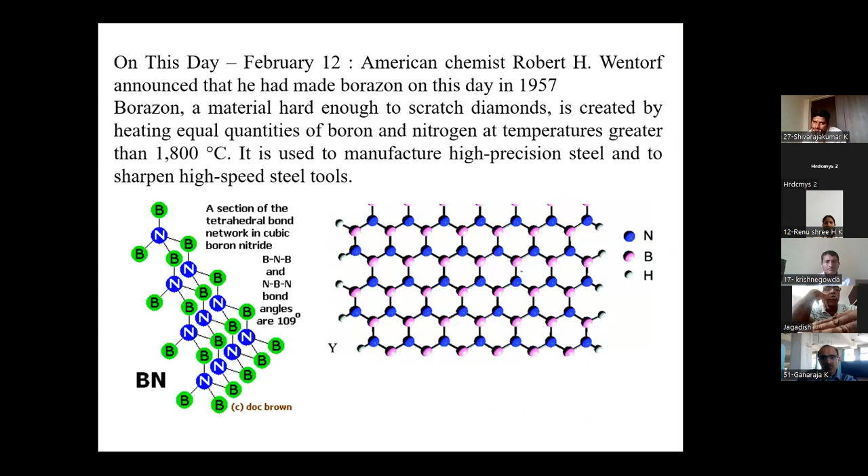So in the meantime, since I am a person working on plastics, we need to develop materials which are sustainable to Mother Earth. So new technologies and approaches are being developed, and you can see biodegradable plastics coming to the market. Still, I won't agree, being a polymer scientist and chemist—it is difficult always to make a material that can mix with the environment and in the soil. It is very difficult, so better not to use much of these plastic materials.

Next slide, please, sir.

So you can see here how traffic has increased and how difficult it is. Recently during Dasara, people were unable to move even a kilometer. Initially when we were children, we didn't have vehicles, and there were only one or two vehicles on the road. Now for one kilometer you can see more than a hundred, like in Delhi, Bangalore, Mumbai, all choked by traffic and the number of vehicles. You can see in the later slides the number of vehicles—I heard in last week's newspaper that 25 lakh vehicles have been registered in Bangalore alone. So imagine the rest of the country. Okay sir, next.

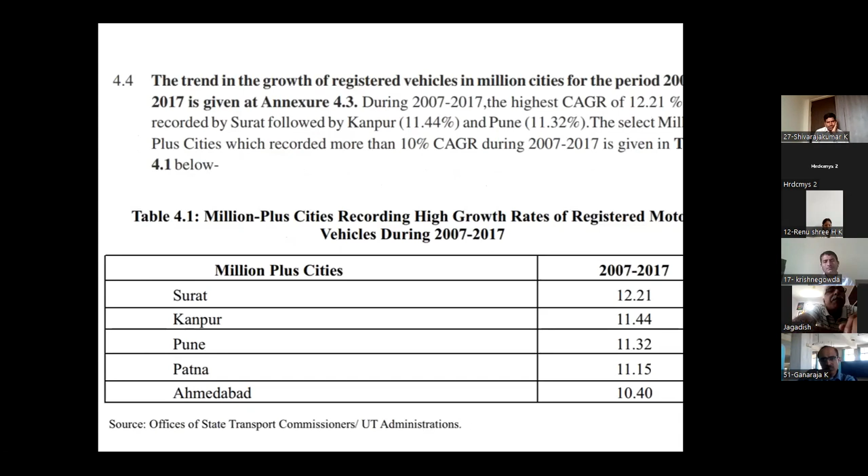Next. So as I earlier told, the two-wheeler population is increasing like anything. Even you can see women started driving from some 30 years back. So now the women population is also going for single vehicles, so the vehicle count is also now getting doubled due to this.

Next page. Here are the total number of registered motor vehicles in millions. How many millions have been registered till 2017, but in 2019 it is still more. Next slide.

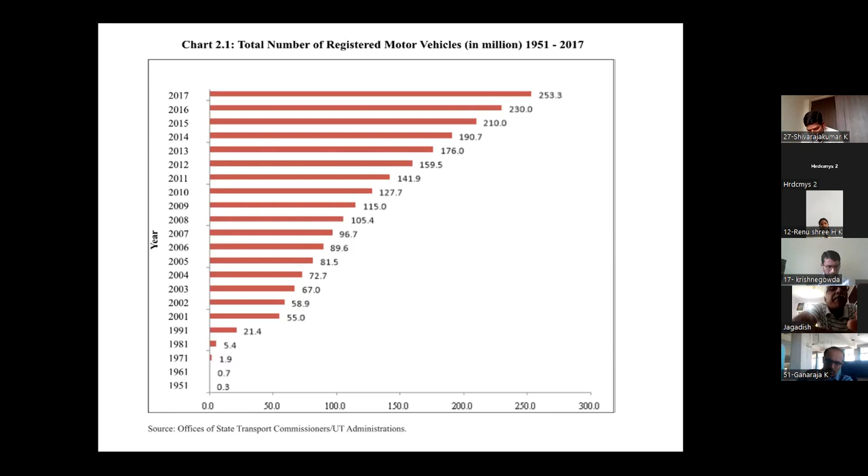See, now I am just talking about the tires. The basics of any mobility is the tire. As you know, in India we usually abuse everything, including plastics. You can see even a chocolate cover or a small peppermint cover may get into any drain and it can choke anything. We think it is a small thing, but it is going to create havoc everywhere. Similarly, overloading is also a problem in our country.

Suppose a bus has the capacity of 50. In some rural regions, since only one bus comes to their village, there will be more than 100 people in a single bus, 100, 110, like that. Even on top, they sit and travel. So what we have to design now is the tire, whichever we design or produce, should accommodate more than 100 people. That is what the scientists, since I was working in the tire industry, we usually design or manufacture a tire which is going to suit the conditions of our country, especially rural areas, where sometimes the vehicle has to pass through difficult terrains because roads are very bad.

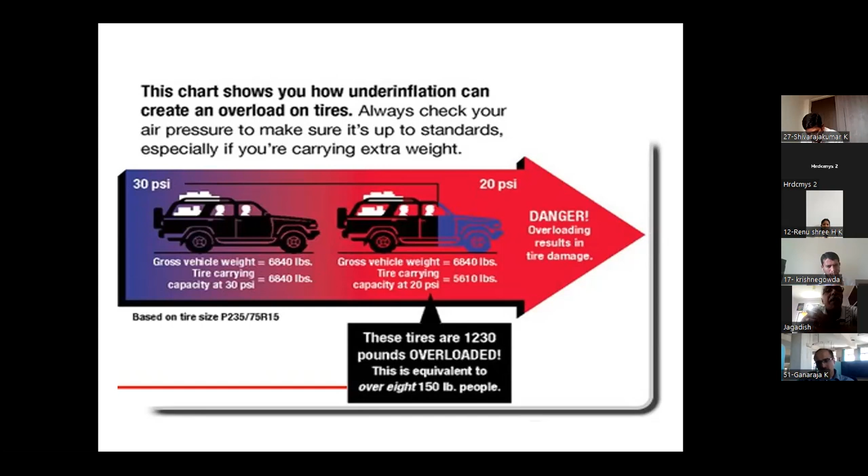Low pressures, you can see how the low pressures and other things are going to trouble us. Next, please.

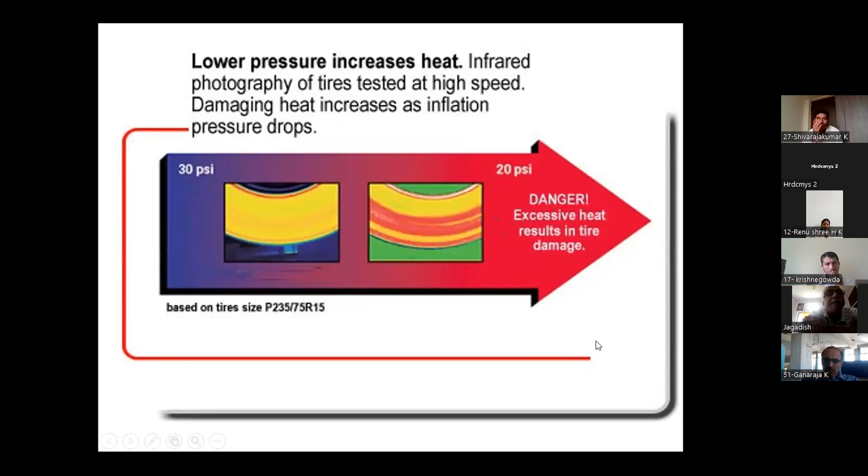So here you can see the complexity of the structure and behavior of the tire are such that no...

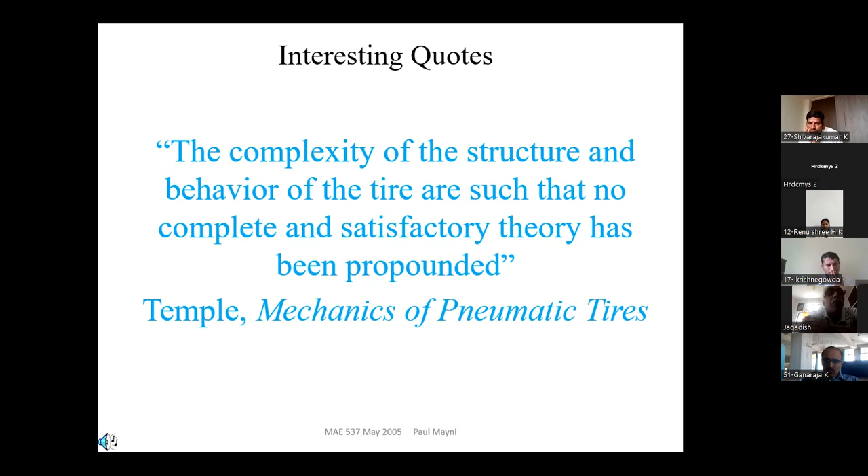So the major aspect of mobility is aircraft. Once you get an airport in your place, there will be services from different agencies. In Mysore also we have a domestic airport, now being upgraded to international. But I am not interested in such things; we are interested in the tires and mobility. Without the wheels, we cannot expect the aircraft to take off. There is a saying that when you travel in air, the only problem is landing and takeoff. Around 600 kilometers speed will be there when it takes off and also when it lands.

So the safety of the tires has to be taken very seriously whenever we talk of aircraft, because in regular vehicles it's the same thing. In a regular four-wheeler, you need better tire safety. You might have seen advertisements in and around Mysore city or Bangalore showing puncture-resistant tires, and smart tires which show the air pressure in the tires. Punctures also rarely happen nowadays for these tires.

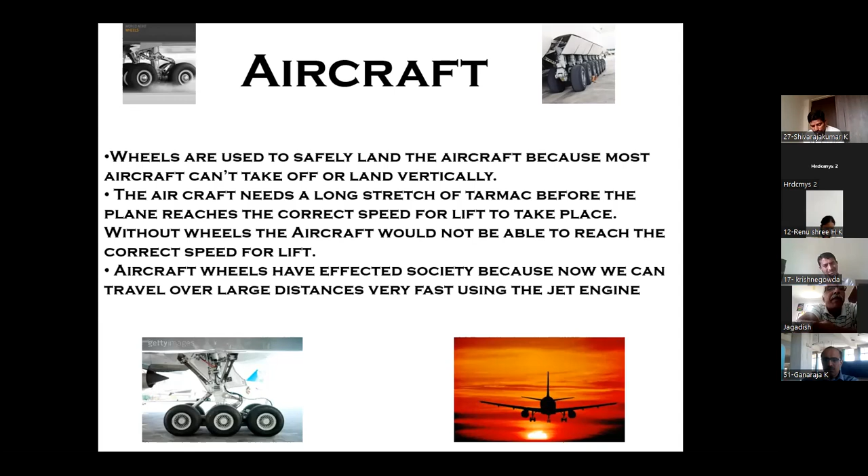This is being done to check the tire. The same type of tire products and compounds being used for application are tested on a regular basis every year in Malaysia or elsewhere in India. We have one track in Delhi, Noida, where they test these tires. That is through Formula racing - our Indian driver Karthikeyan has the capacity to run these vehicles.

We can see the person who is on the cockpit - it is known as the cockpit. The cockpit is made of durable and sustainable plastics, so even if there is an accident, nothing will happen to the person driving it. You should dare to drive at the speed of 600 kilometers. So once these vehicles go at 600 kilometer speed and the tire satisfies the conditions, then the same type of tires are used for the automobile sector also, whether two-wheeler or four-wheeler.

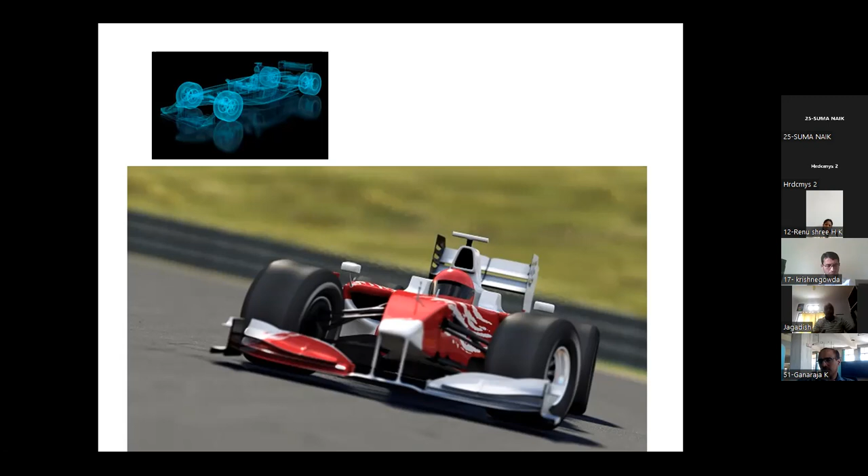Next slide, please. These are the Formula One tires built for performance rather than longevity. You can see the green stripes and wet weather stripes. The same type of tires are manufactured for our own vehicles which run here. Suppose we are in Kerala or Mangalore, there will be heavy rain during rainy season or any time - there are chances of slipping and the grip may not be there for the tires.

But nowadays, when they manufacture tires, if it is for coastal regions, the tire will be different; for Leh Ladakh or Himalayan regions, it will be different. That is why I am showing this - this is the market strategy by companies where they test the tires through Formula One. Formula One tires do not use ordinary air for inflation, they use nitrogen. I think you may also be using nitrogen for your vehicles, since nitrogen is inert - it's better to use nitrogen for all your vehicles, as it stops the oxidation of the material.

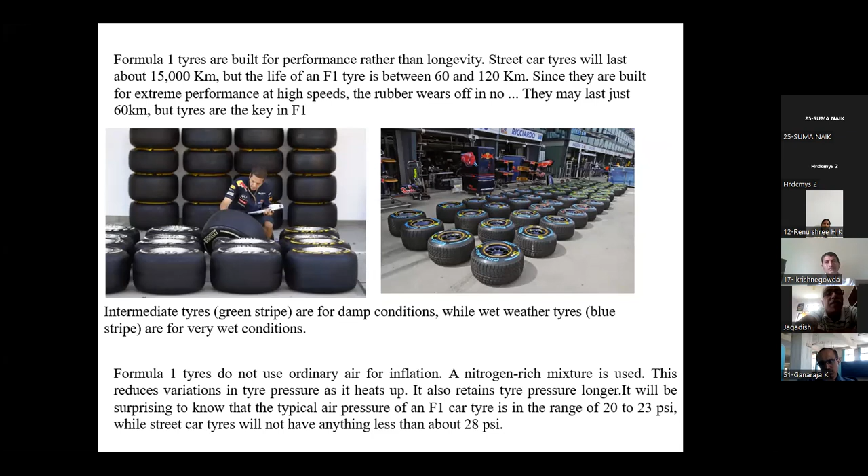Okay, right, next one. So you can see here, once you create something, it has to be useful for everyone. If there is an accident and a person's mobility is hindered, then we need to have a vehicle or a wheelchair which can take him to any place.

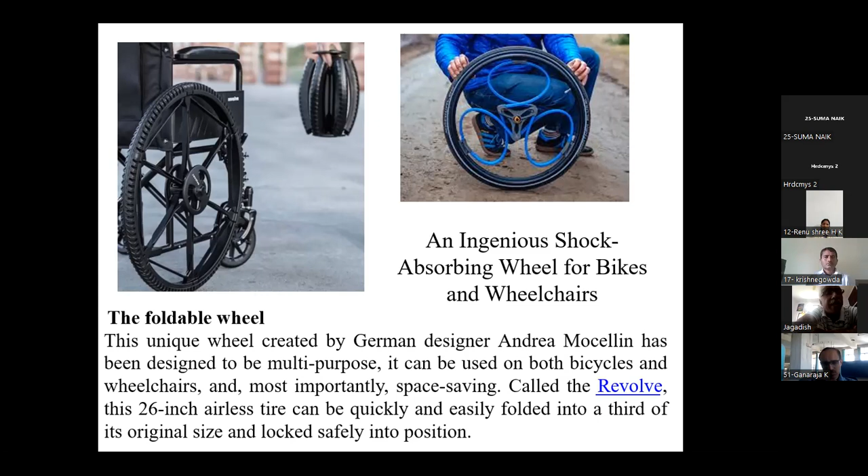You might have seen - I saw once in Singapore, there was a staircase and they had a vehicle instead of a lift. People could sit on the chair and it would take them to the first floor or second floor. Similarly, there are people who have made a foldable wheel for that purpose. This is an airless tire which can be used and is space saving - you can take it anywhere and use it for that purpose.

The military is involved in a number of applications, and whatever the military gets for its vehicles will later be given to the general public. This is one of the tires, a wheel which has got shape-shifting tracks. It can shift the tracks. These are new generation tires which may come into the market shortly.

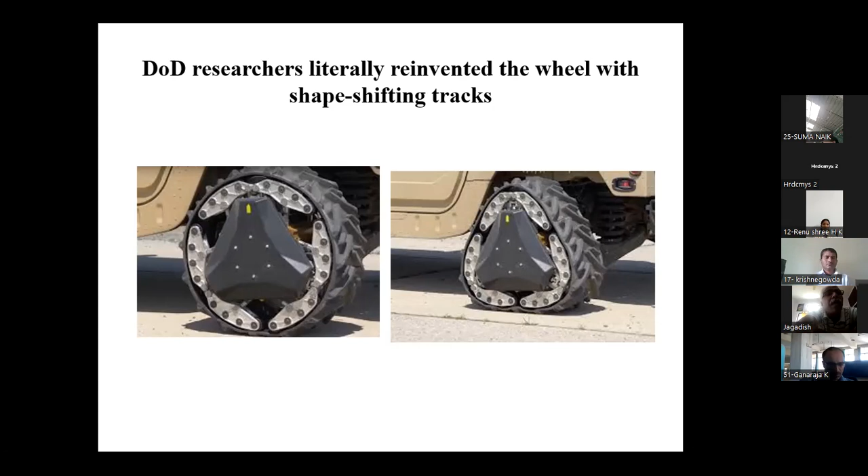A wheel - we used to imagine the tire as circular, but now the wheel has been invented in a sphere, like a ball. Once the ball is fixed into the vehicle, it can move in any direction. I can't show the video because of some technical problems, but this is the spherical AI wheel. Usually nature provides all sorts of solutions.

Here you can see marine algae, which has got the capacity to remove water from its surface. They have taken the concept from this marine organism and used it for making a tire. In future, we may have to use this type of tire, known as the spherical wheel, which can sense, decide, transform, and interact. This is known as the revolutionary tire being made by the Goodyear company, known as brain coral.

So here you can see the tire of the future, and it's completely spherical. The Goodyear Eagle 360 has been built with self-driving cars in mind. You can see self-driving cars have already been test-driven in some countries. I don't think that will be possible in India, because it is very difficult to follow traffic rules here.

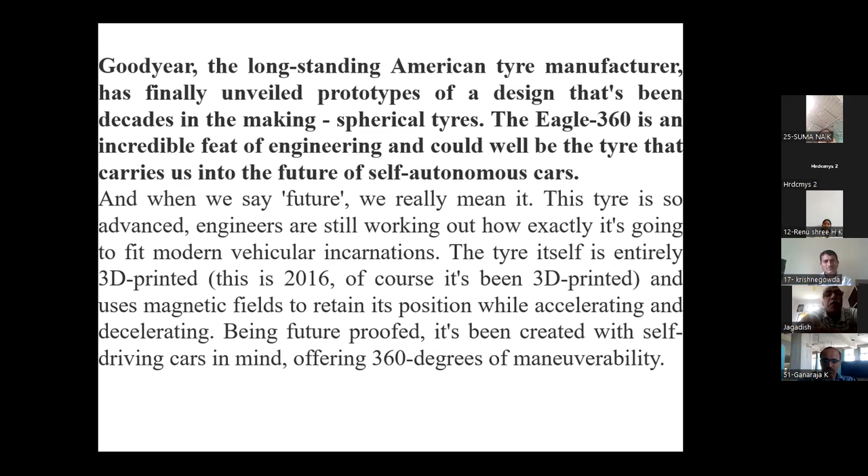So this is the evolution of tires. We were already knowing about this - you can see it near Tanjavur, at the Darasuram temple, where they have made a beautiful circular tire. You can just see how even the spokes are made. This is, as you know, the stone Ratha in Hampi.

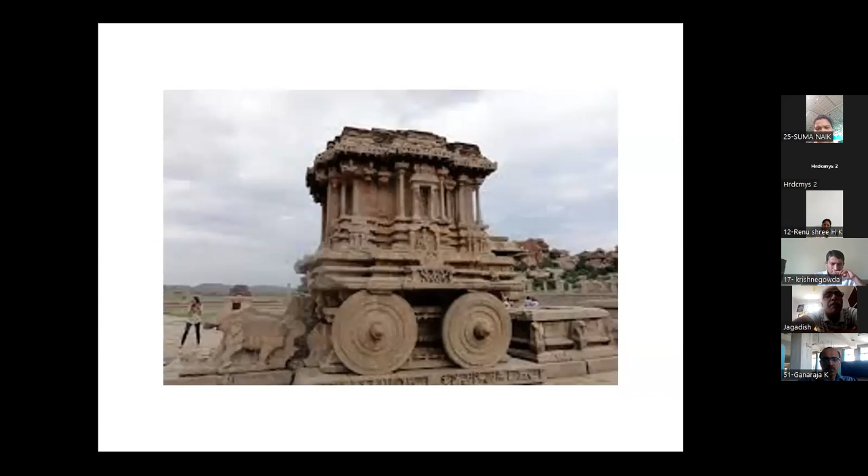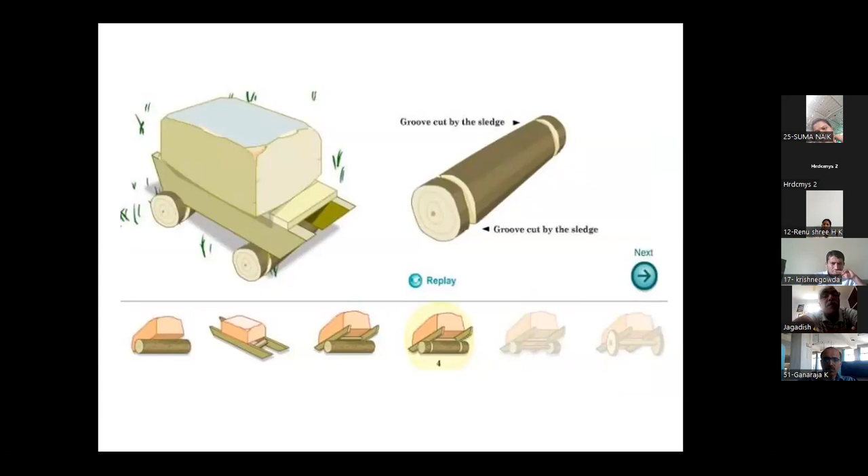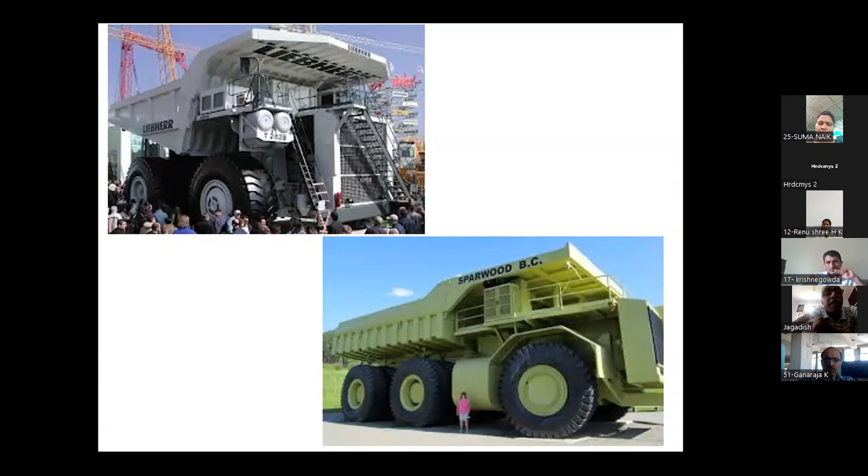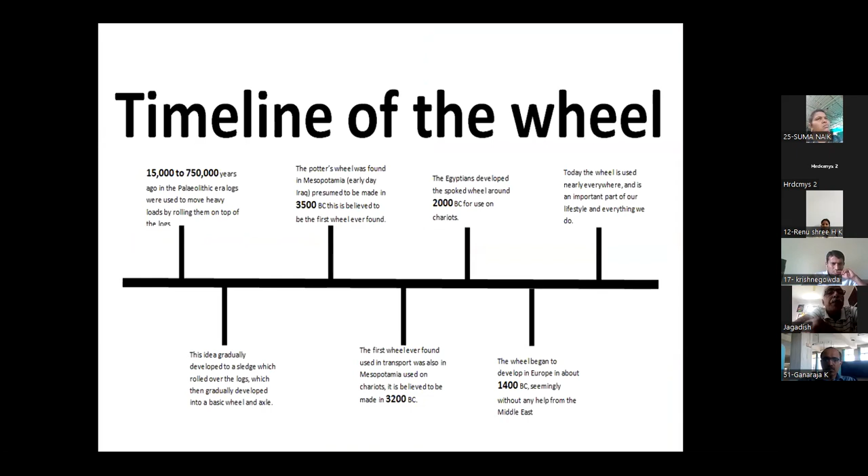So these are the history of the wheel. I wanted to just tell you how mobility has become an important aspect in these years - 2022, 2023, 2024 - and most industries are going behind these things.

Dunlop bicycles made the first pneumatic bicycle tire in Scotland. He discovered the vulcanization of rubber to make the best out of it.

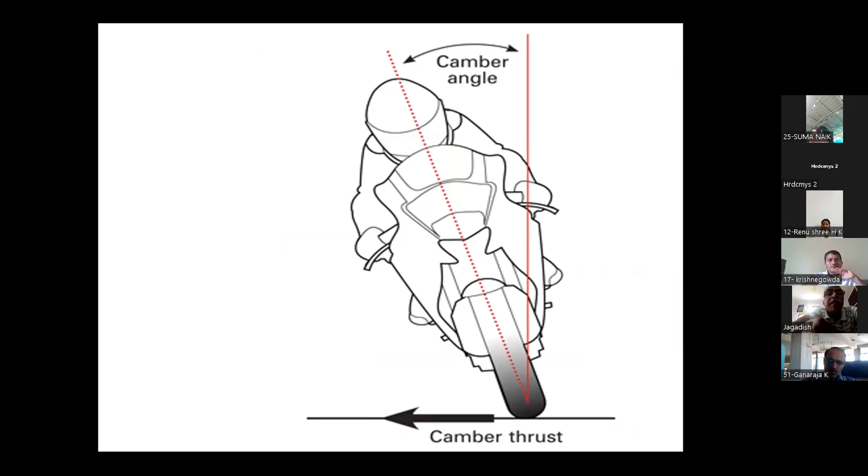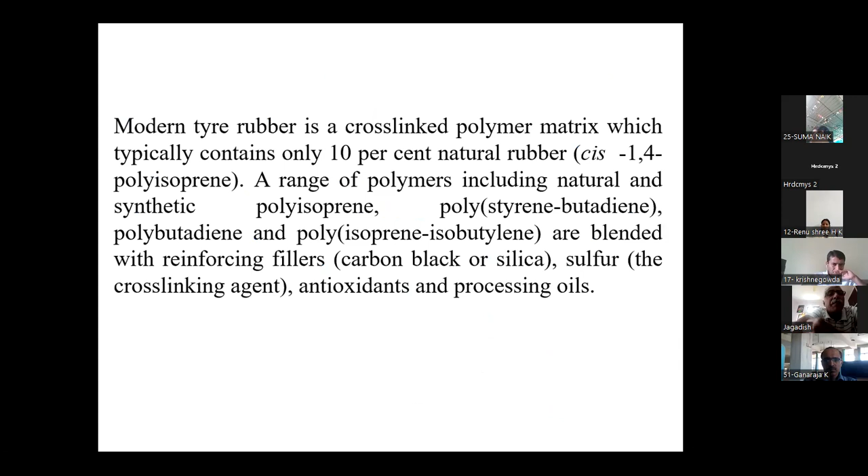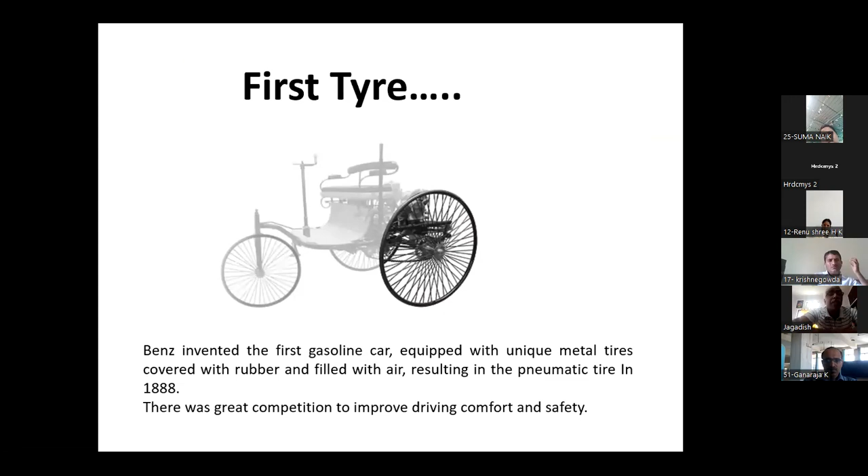So this is how the mathematics works with the tire companies. This is the evolution of tires I already showed - the ancient wheel, the first tires, from 1888.

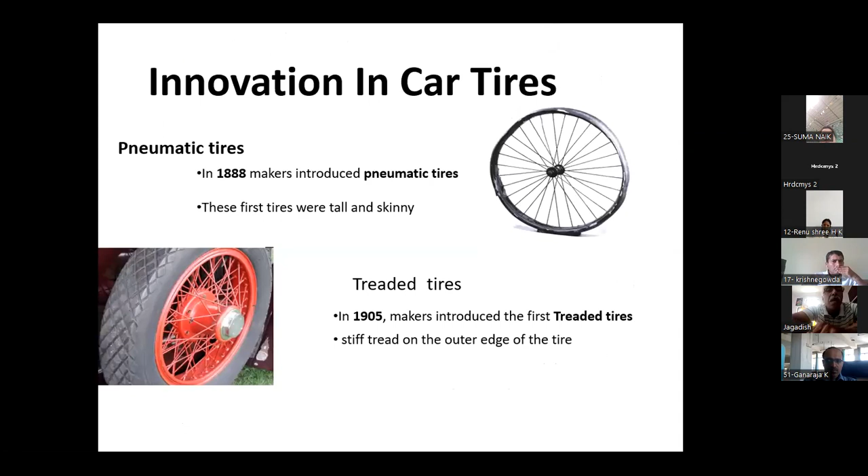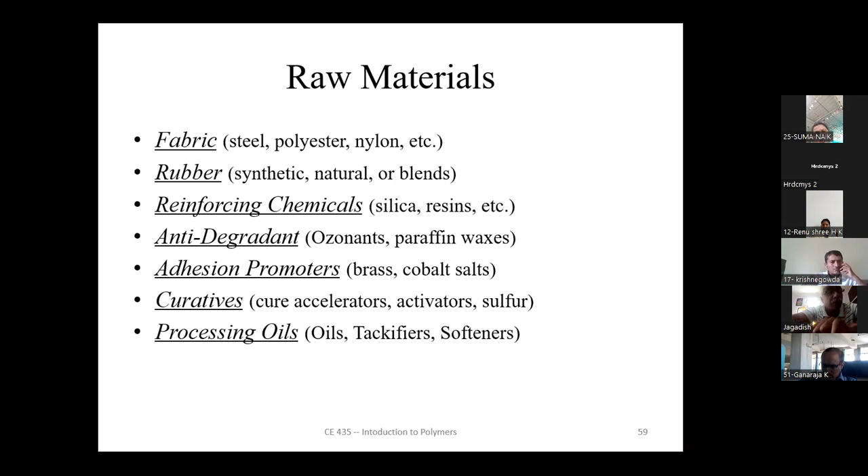So this is how the materials are being made. The building of a tire is not an easy aspect. It is a complex process where you need to have different types of materials, not only fabric.

Now you might have seen the tubeless tires. Tubeless tires don't need a tube or the envelope. So we have come from tube to tubeless. Now we have 50% of tubeless and 50% of tube type tires, and the vehicles fitted with them are running on the Indian roads, and globally they are running.

But in future, we may have to go with a different type of tires which has been invented, including smart tires. There is a tire known as Tweel, where there is no concept of air itself. The tire surface itself will take care of the road, and it will adjust itself so that the person sitting inside will be very comfortable.

But my aspect of tire is what to do when the tire is being scrapped. Imagine there are lakhs of tires scrapped every day. So what to do? Recycling is also an important aspect these days. People are working on that, and some of our colleagues and friends in the industry have succeeded. They have come out with a beautiful way of recycling these tires.

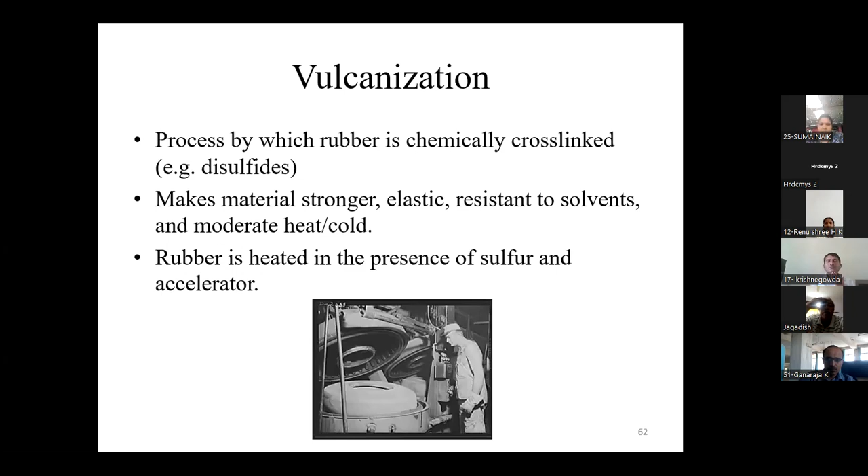Mechanisms - so these pneumatic tires, the evolution of the pneumatic tire itself is a wonderful aspect. You can see here, American tire manufacturers tried to avoid a costly transition to radial tires.

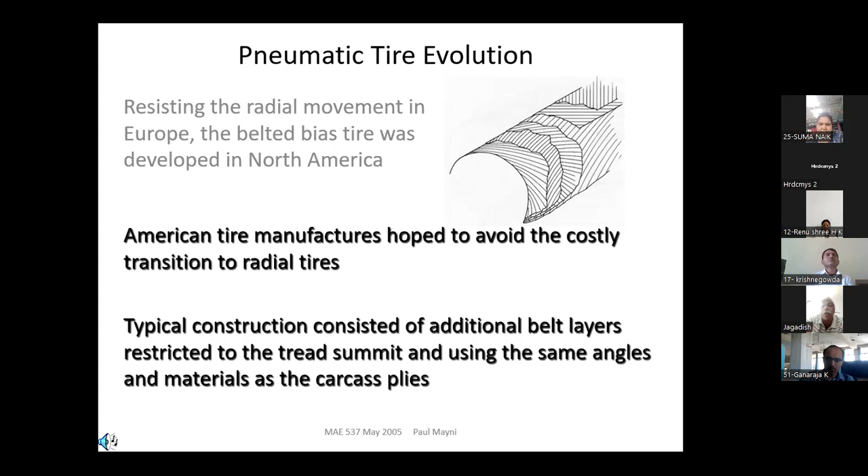So we have to look out for tire safety. As you know, the number of accidents - Karnataka stands number 2 in accidents, and overtaking is the number 1 culprit, and two-wheeler deaths are more, as per records last week from the government of Karnataka and government of India road transport department.

You can see that tire safety is one of the most important aspects whenever you drive a vehicle, because as far as accidents happen, sometimes I have seen people without insurance, without proper documents, driving under the impression that they will not be caught by the police or vehicle department authorities. But due to bad luck, if they get into an accident, the whole family's economy will be hampered.

That is why the industry and scientists like us want to ensure tire safety and vehicle safety are important aspects. From the past month, people were discussing seat belts. Initially, we invest lakhs together for the car, but we don't want to invest another 2 lakhs for safety purposes.

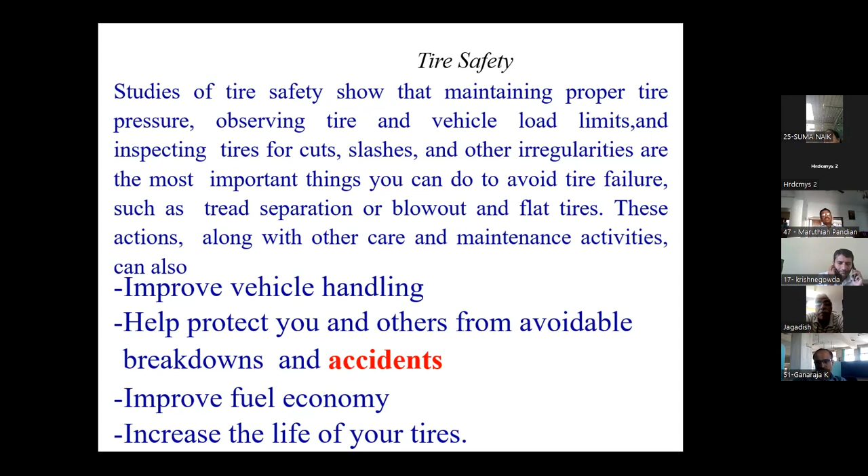You should have proper air in the tires also. This is most important. We usually concentrate more on the outer look of the vehicle - we wash, we clean, we polish everything. But people usually ignore the tires.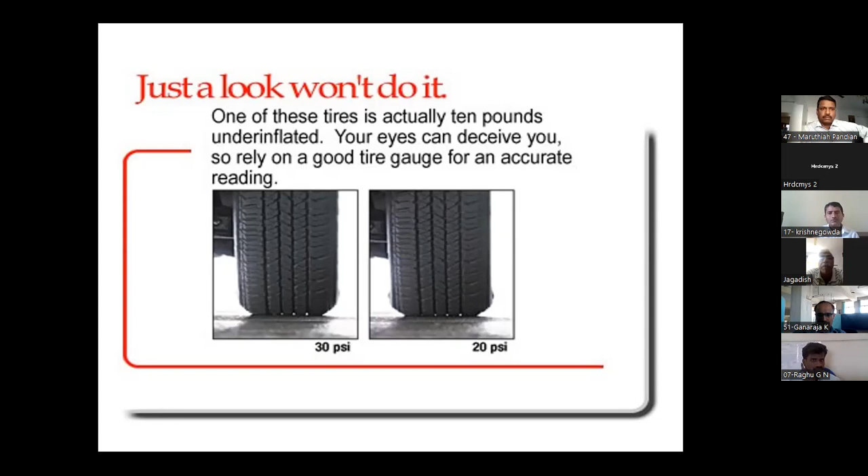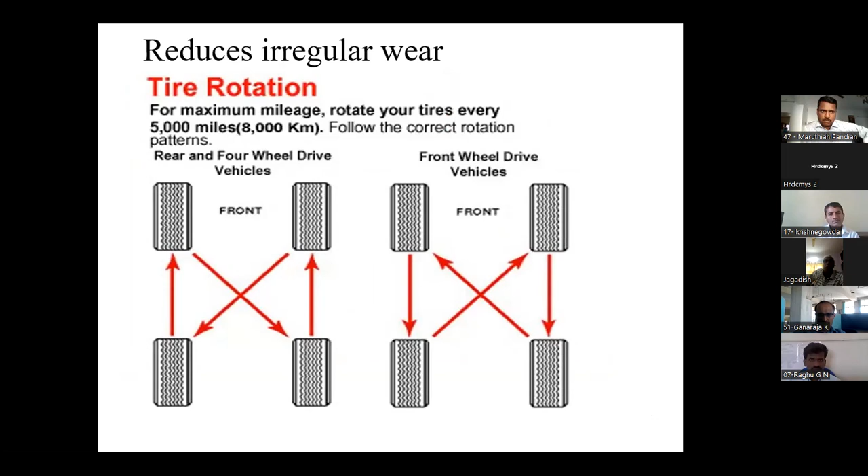This is about irregular wear and tire rotations. You have to do tire rotations. So you have to inflate, rotate, and evaluate.

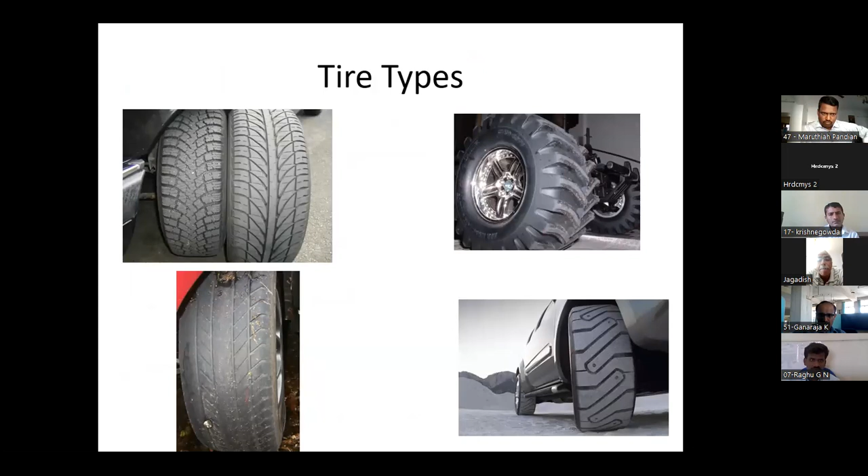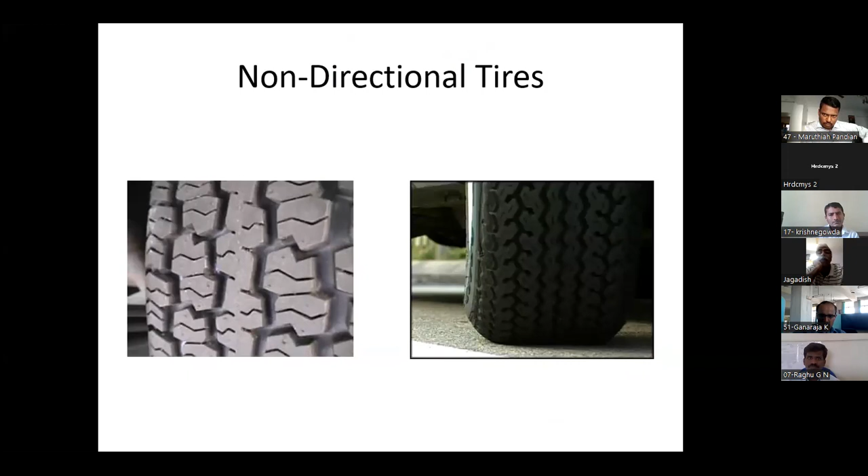So non-directional tires - I wanted to tell you how many types of tires are available in the market, and how they are being used. Non-directional, directional tires, different types of tires are available.

So as a common man you have requirements for a good tire - you can see low rolling resistance, better high speed performance, and lesser heat generation.

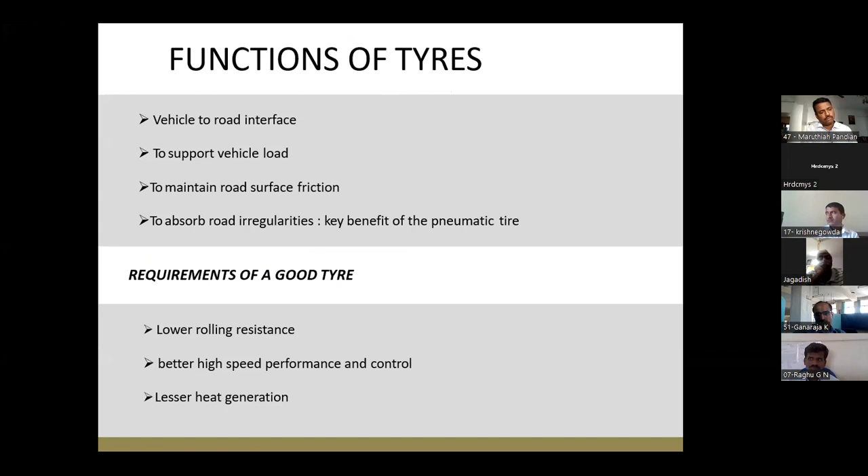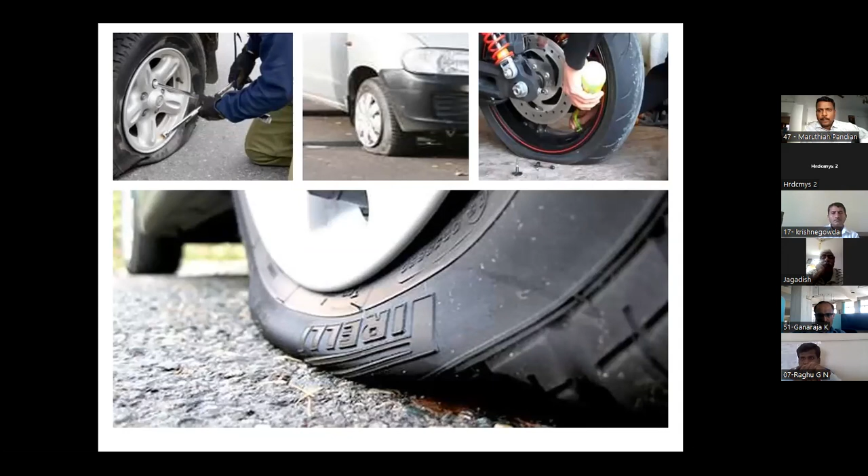So here is where they get punctured, and now we don't want to have downtime. Now there are puncture resistant tires available in the market. See how the market is developing - whatever you want, whatever you expect, that will be sanctioned by the scientists and technologists. They just come out with that. You can see new vehicles - if you visit any showroom, new vehicles with new safety regulations will be available for the common man.

So even the pollution is at the highest rate when they use this. That is why the next generation pan will be with steam or heaters, or with solar - they are trying with solar. So these are some of the aspects that have been taken care of by people who worry about the environment.

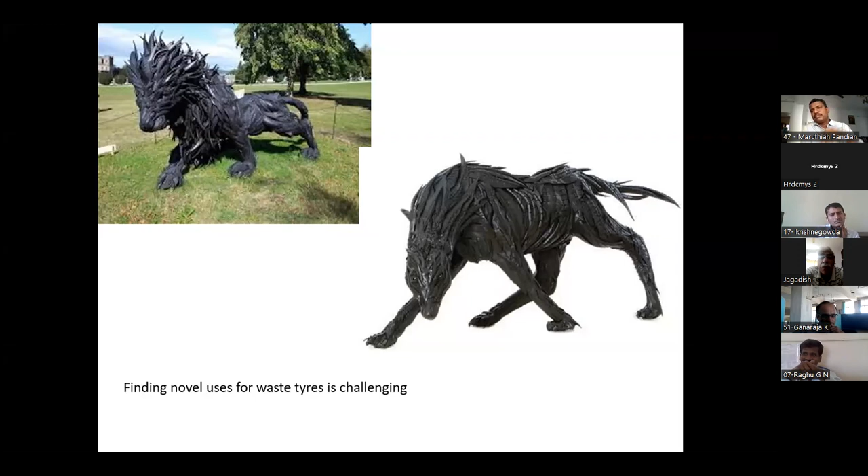Next type. So you can see the next, please. These are all about the tires one. Next.

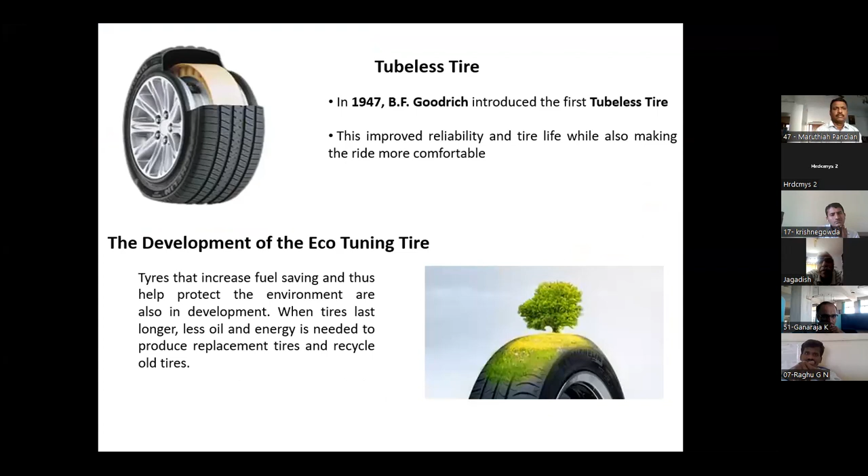So the development - most tire manufacturers think of new types of eco-friendly tires. One aspect of being eco-friendly is fuel efficiency. If the tire itself is not able to contribute towards fuel efficiency, it is a very difficult aspect.

So what they try to do is, as you know, when the tire runs on the road there will be friction. Friction means if one thing is running and another is stationary, there will always be friction. This friction causes heat development, and the heat development causes destruction or decomposition. This decomposition creates a problem for the tire, and the tire loses its efficiency. Ultimately, the fuel economy comes down. That is why people are going for new types of car tires or vehicle tires, so that everything will be fine and faster.